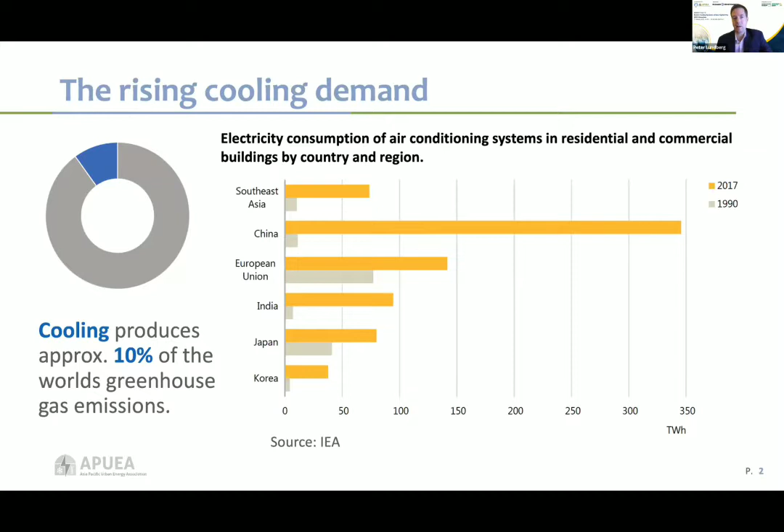Looking into Indonesia, the cooling demand can be demonstrated with cooling degree days, a measurement of cooling demand. Today's cooling demand in Jakarta is about 3,800 cooling degree days, equivalent to neighboring countries including Philippines, Malaysia, Thailand, Singapore. But the AC utilization rate in Indonesia is only around 9%, compared to Thailand's 30%, and Singapore and Malaysia's 80%. So the cooling demand in Indonesia will grow, following economic and population development, but also due to climate change.

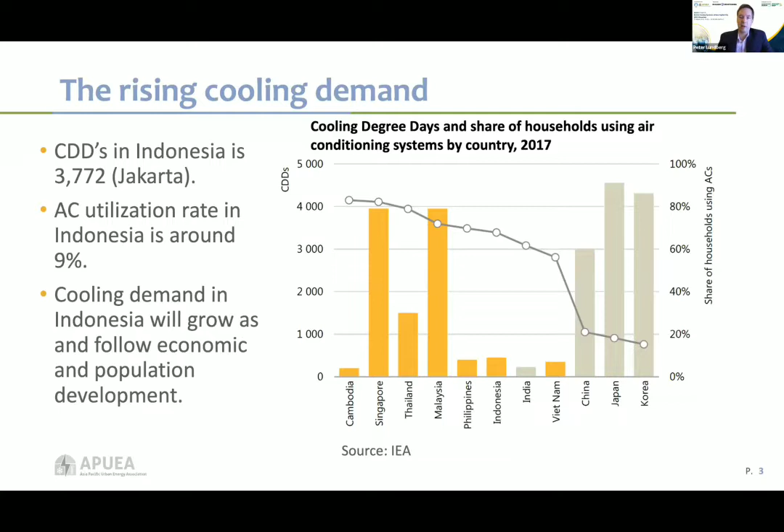Cities play a vital role in mitigating climate change and meeting the growing cooling demand. Cities occupy only 2% of the world's landmass, but consume over two-thirds of the world's energy and account for more than 70% of the world's CO2 emissions. Looking into buildings, they stand for 30% of final energy consumption in the Asia Pacific, and account for a large part of greenhouse gas emissions in cities.

For example, in Hong Kong, that number is 60%. In Tokyo, it's 30%. In New York, it's 70%. Space cooling is the fastest growing use of energy in buildings, and cooling accounted for 18.5% of the total electricity used in buildings at the moment.

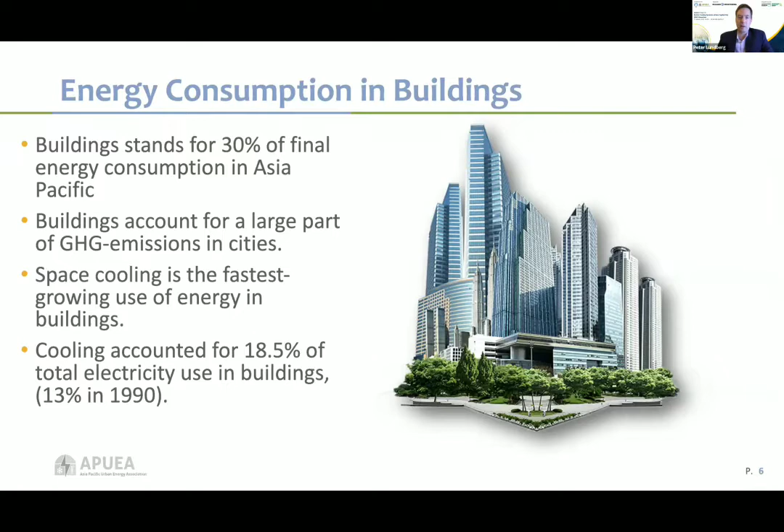I just want to end here by mentioning some developments in Thailand. The Thailand government has invested in a new national government complex in Bangkok, basically a campus collecting different government agencies in one place in the vicinity of Bangkok city. This complex has a district cooling network providing 42 megawatts of chilled water for about 1 million square meters. They have reduced energy consumption by more than 100,000 megawatt hours and reduced 50,000 tons of CO2 emissions.

This is a good example of a trend going on in Thailand, and I think it might be very interesting for the new capital city in Indonesia. I also want to mention that this project is the winner of the Global District Energy Climate Awards as the best district energy system in a developing country in 2021.

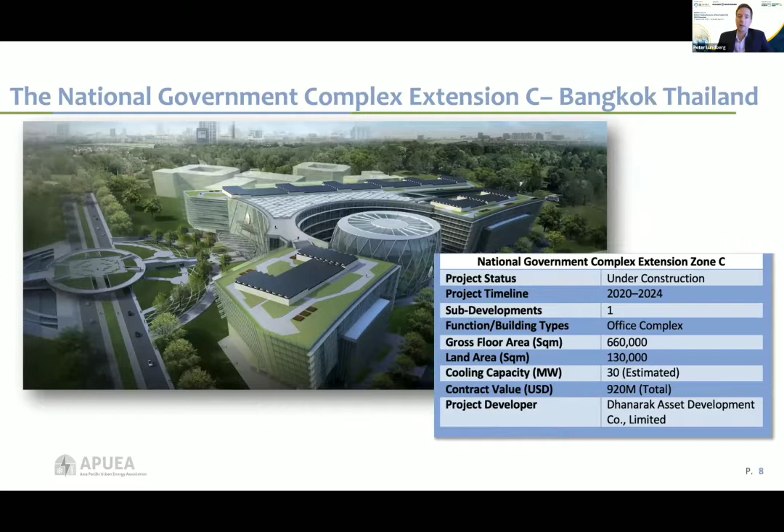They will also expand to build another campus, so the trend is continuing with this kind of government complex, and they will also have a district cooling system of about 30 megawatts.

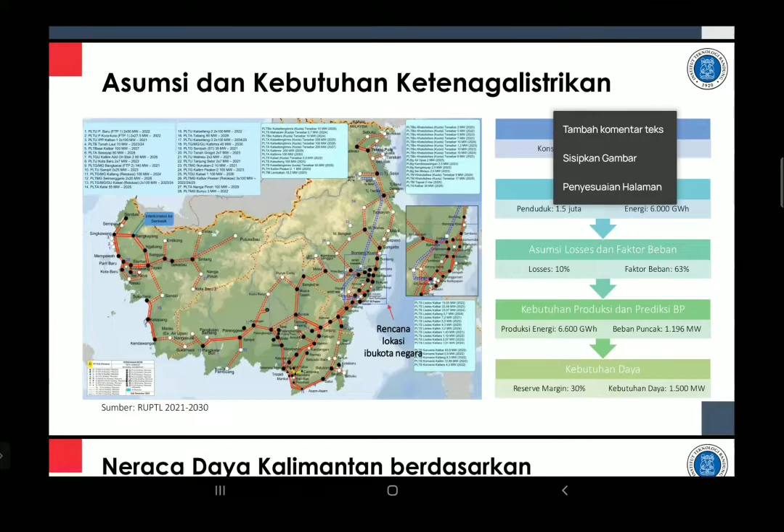We assume the electric consumption per capita is 4,000 kilowatt hours, with total energy of about 6,000 gigawatt hours. So the power need is 1,500 megawatts with a reserve margin of about 30%.

This is the supply for the capital city. You can see in blue, this is in the capital city.

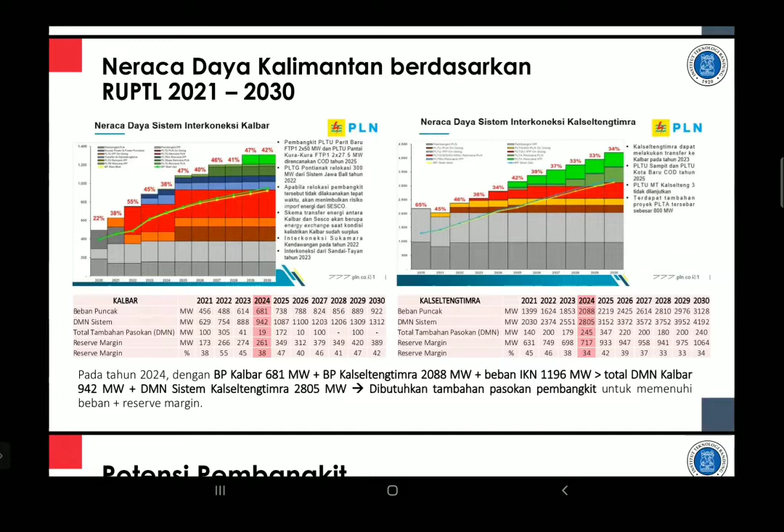If we look at the power balance in Kalimantan from the RUPTL 2021-2030, in 2024 the reserve margin is about 260 megawatts, 38% in West Kalimantan. But in Kalseltengtimra, we have a high reserve margin of up to 700 megawatts.

What is the potential power plant we can build there? For example, in North Kalimantan, we have PLTA Sa Tubu 200 megawatts, PLTA Mentarang 240 megawatts, Sembakung 250 megawatts, Kaltara 300 megawatts, Kayan 1 at 900 megawatts, Kayan 2 at 1,200 megawatts, Kayan 3 at 1,800 megawatts, and Mentarang Induk at 1,175 megawatts.

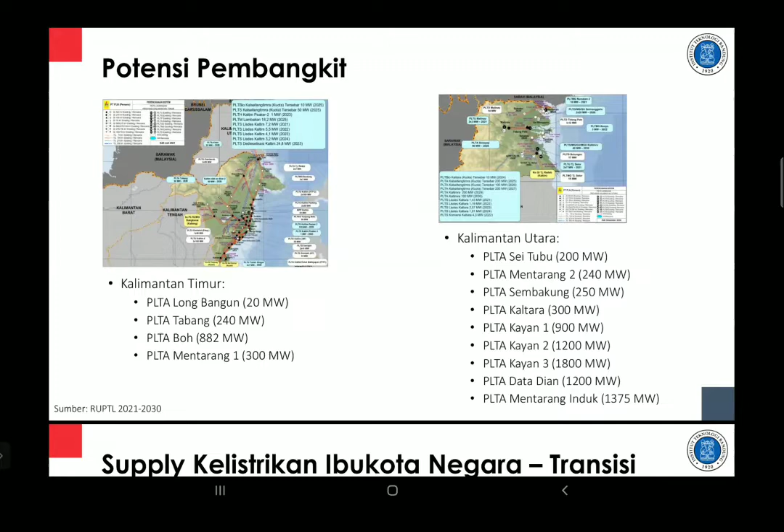In North Kalimantan and East Kalimantan, we have PLTA Long Bangun at 20 megawatts, small hydropower Tabang at 240 megawatts, hydro Boh at 882 megawatts, and Mentarang 1 at 300 megawatts.

How about our concept for the development of electricity on the ultimate side? The blue line is 500 kV in the outer ring and medium ring, and at the center of the capital city the network goes in from 70 kV up to the new capital city.

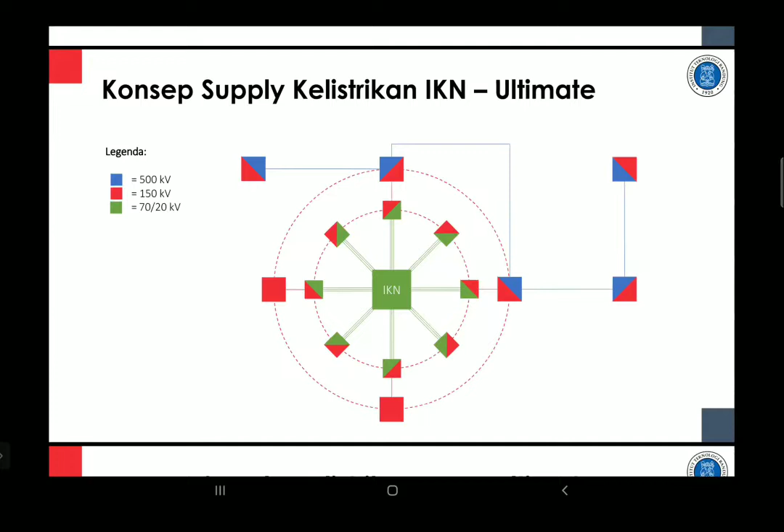Supply will come through 150 kV in the first circle around the new capital city. The second ring combines 150 kV and 275 kV relay, though this is not yet in place, and 500 kV will also supply the network.

That is the ultimate supply from 150 kV to the capital city, which sits at the center of the network. We can feed it from GI Samboja, Sepaku, Embalut, and Petung.

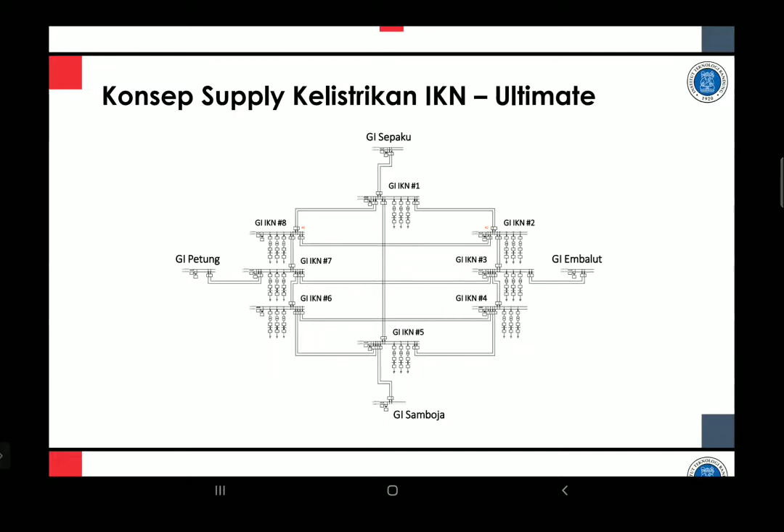There are four substations supplying the new capital city directly. This is good for the reliability of the power system in the new capital city.

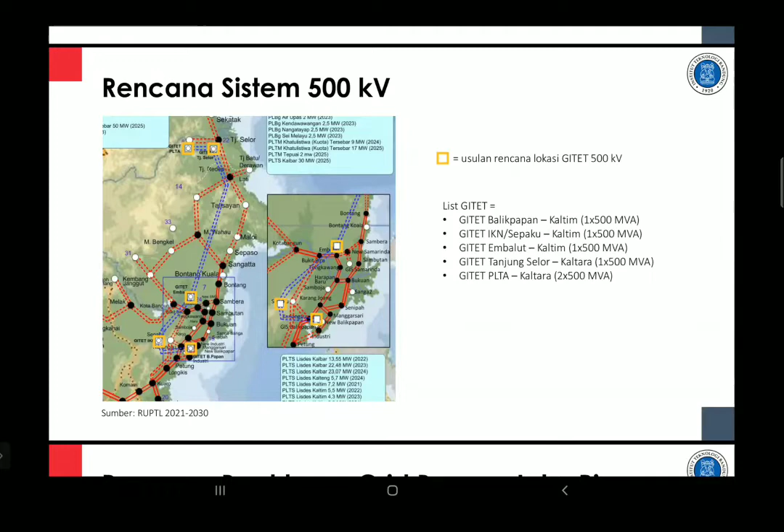We have 500 kV supply already stated in the RUPTL: from substation Balikpapan Kaltim 500 MVA, Sepaku Kaltim 500 MVA, Embalut Kaltim 500 MVA, Tanjung Selor Kaltara 500 MVA, and PLTA Kaltara 2 times 500 MVA. This will support the new capital city.

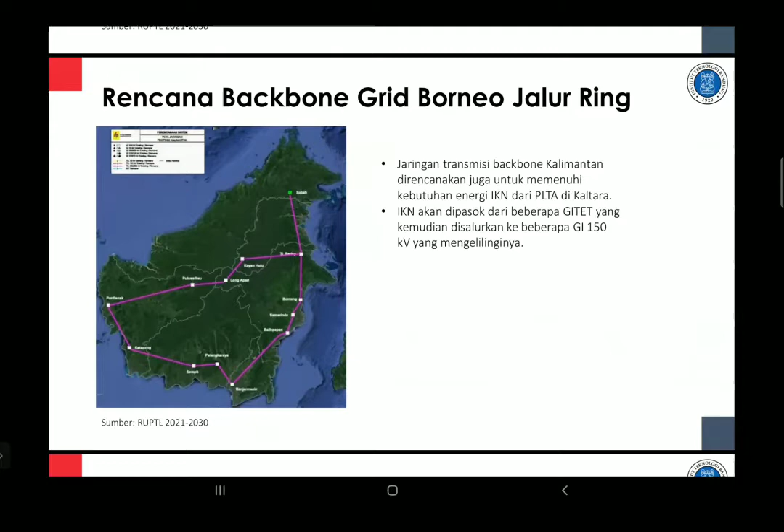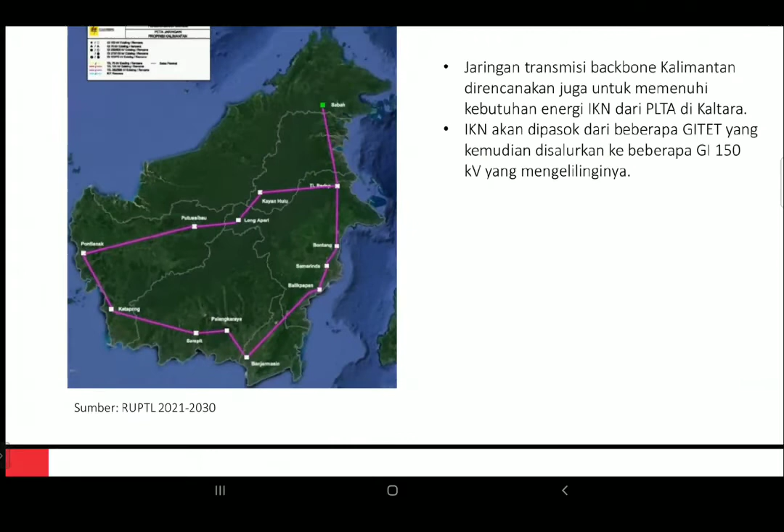If we look at the backbone of the Borneo grid at 500 kV, it comes from Sabah going to Tanjung Redeb and also Kayan Hulu Long Apari. This 500 kV network will also support the new capital city. This 500 kV line is already planned by the utility, PLN.

But we have some problems with small signal dynamic analysis in the Kalimantan interconnection, regarding inter-area oscillation and local area oscillation frequencies. This is in the high voltage and extra high voltage network.

But within the city itself, the new capital city will be supported by a 20 kV model using flexible operation network for high reliability.

We have 3 zones: R1, R2, and R3. R1 is the center with an area of 2,000 hectares. R2 is the district of the new capital city with 40,000 hectares, and the outer area covers 180,000 hectares. These three zones should be supplied with good reliability of electricity.

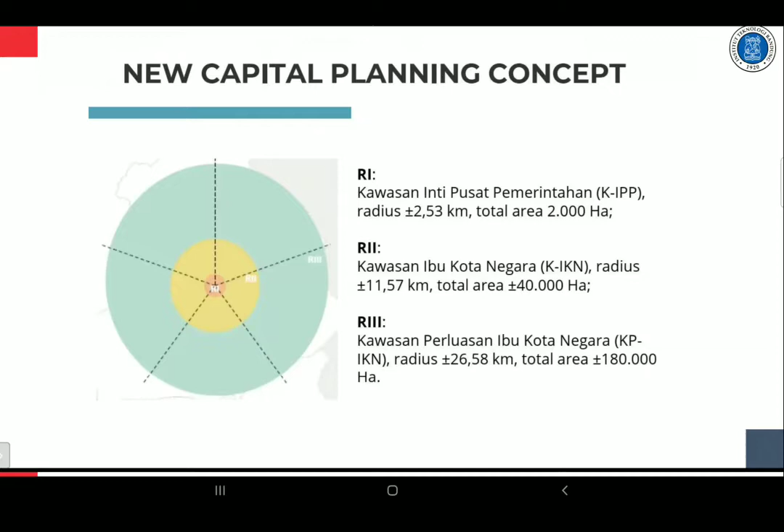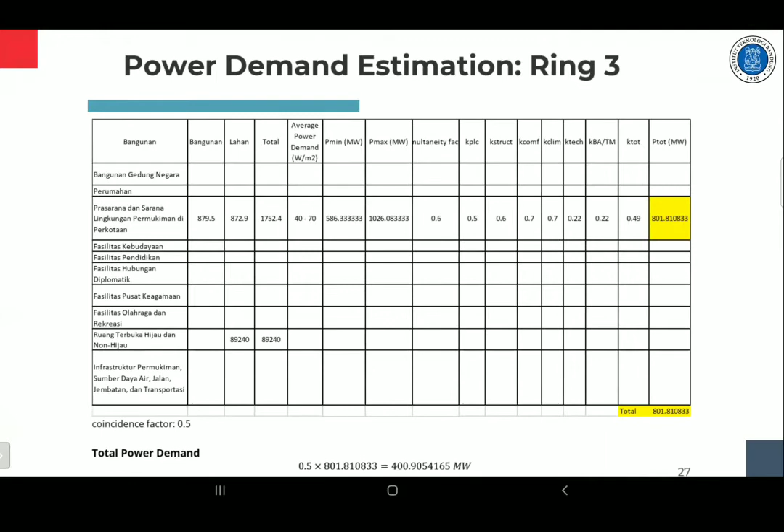So if we calculate the substation requirements: for Ring One we need 2 substations at 150 kV and 20 kV; Ring Two needs 8 substations at 150 kV and 20 kV high voltage substations; and Ring Three needs 5 substations with a capacity of 80 MVA.

The total requirement for high voltage substations is 15 substations to support the new capital city.

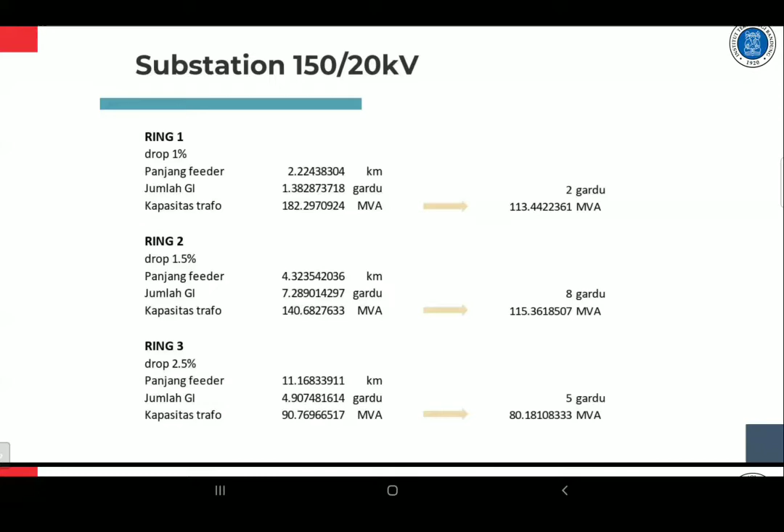For low voltage distribution substations, we have already calculated about 2,200 distribution substations will support the total area of the new capital city.

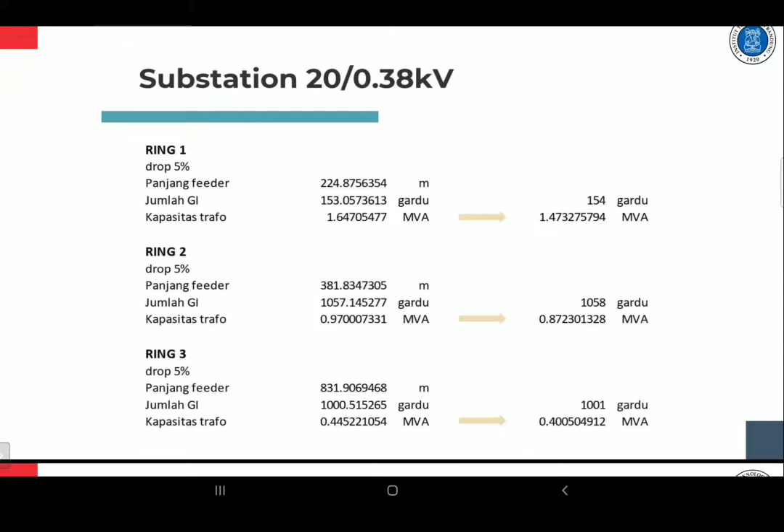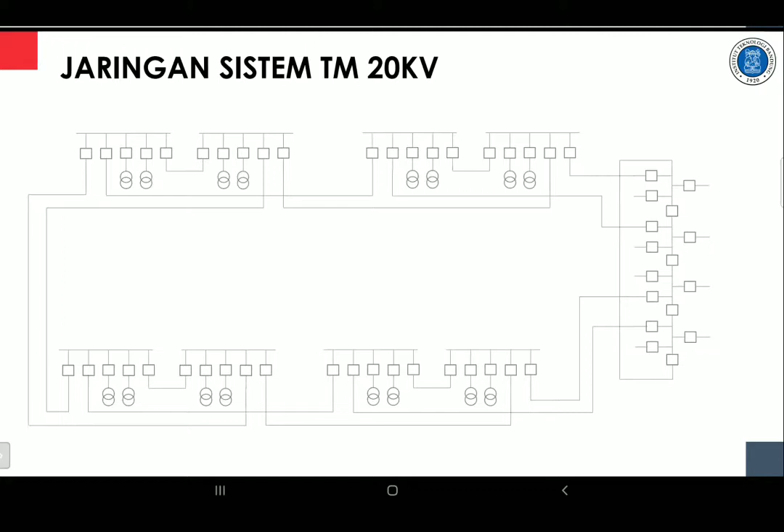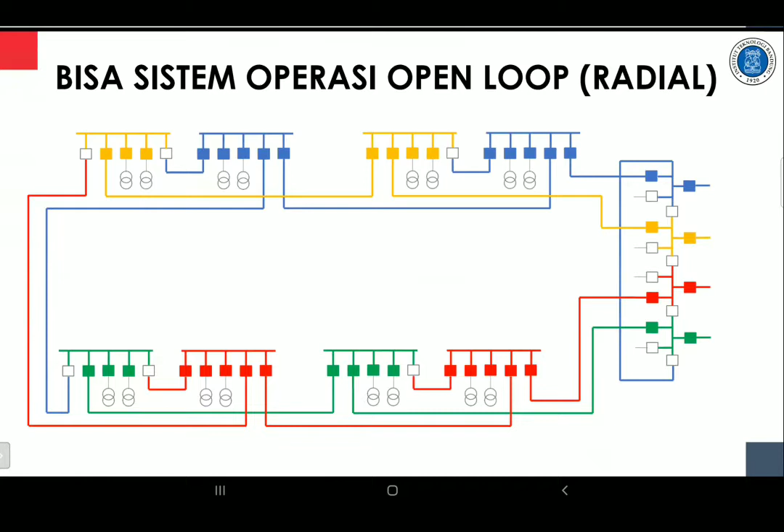How will the network be developed? The network will be developed for 20 kV based on open loop and ring system, and also loop system and mesh system. The concept is to get high reliability to supply all of the office buildings in the new capital city.

This is the operation based on the radial open loop system that is built in interchange, like this. This uses a fork modification of the open loop system, like the one we use in Soekarno-Hatta Airport, the model for operation with high reliability for the 20 kV network.

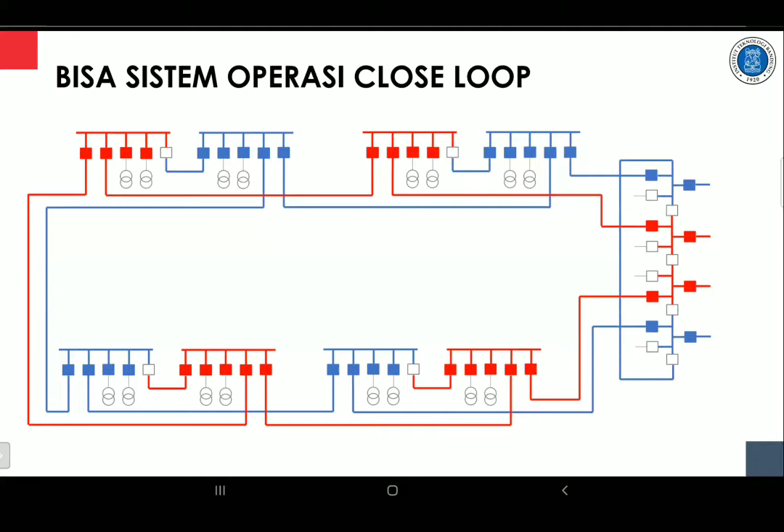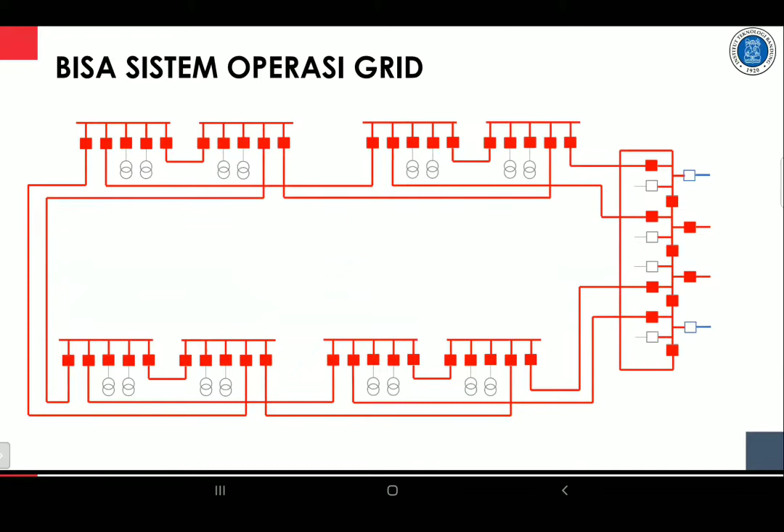And also for the closed loop, the closed loop network of 20 kV, there is higher reliability than the first and second ones. This is the grid operation. This is an alternative way of operating the network in 20 kV.

For the low voltage, we have added some UPS at some points to get better reliability without dip, meaning without voltage dip. We calculate all of the load, separating loads that are not allowable for dip and loads with allowable voltage dip. We cluster them and add the UPS system there.

We have some simulations, for example like this. For instance, if a fault happens there, what happens is the breaker here and here will be turned off, and then how will the system be covered? This is really the simulation of the network for the fault and for the restoration.

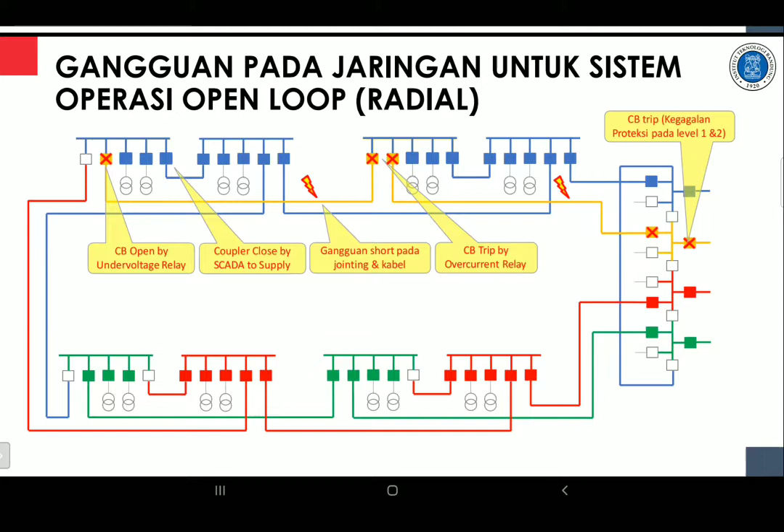This is for the open radial, how the network is covered to get good reliability in the system. We check until n-2 contingency, meaning 2 of the components in the cabling network will be off from the system. The system is still available, good, and running well.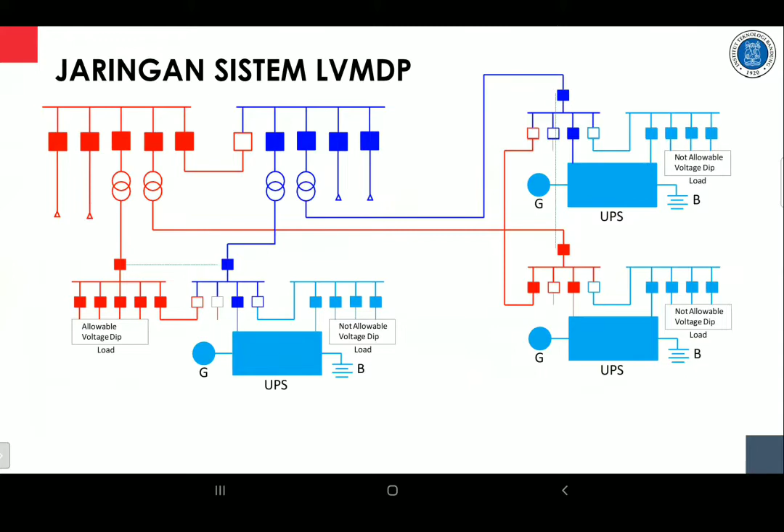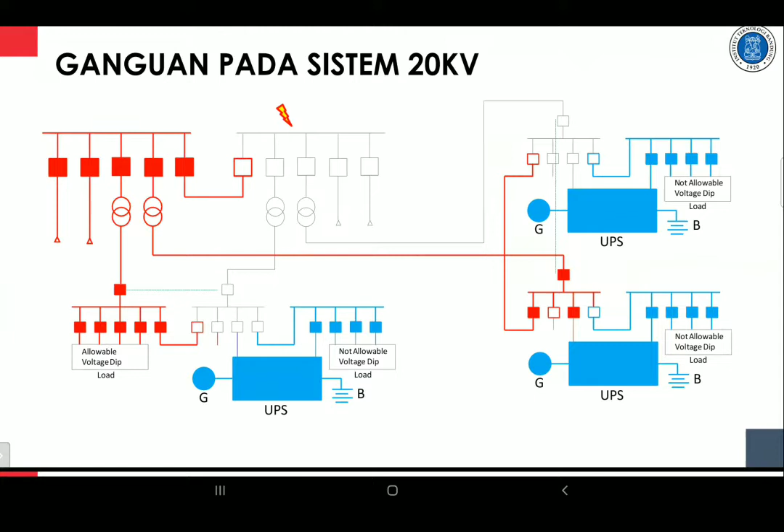This is our presentation on how to get good reliability. We have presented the big system, high voltage, extra high voltage network, and the 20 kV network that will be fit into each housing or office building in the new capital city. I think that's good. Thank you for this presentation.

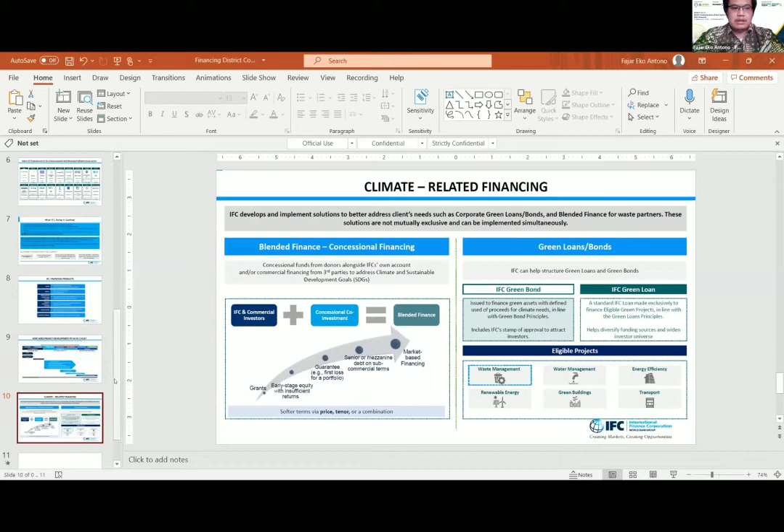So, very quickly on IFC and our role in urban infrastructure development, including in this session, the district cooling utility. IFC is part of the larger World Bank Group, along with our sister organizations. What makes us unique compared to other organizations within the World Bank Group is that we are mandated to boost private sector solutions to tackle or solve development problems. Throughout our history, we have committed no less than 60 billion in portfolio, including 30 billion committed last year.

Our products, or what we can offer to the private sectors working in this space, is basically, first of course, as a financier, we provide investment. We can work through multiple instruments, either loans, equity, derivatives, structured finance, blended finance, syndication, trade or commodity finance.

But apart from that, one of our additionalities is to provide upstream as well as advisory services. We position ourselves as a long-term partner for our client, not only by providing investment, but also working with them even prior to the investment itself, to prepare the project, even sometimes to the extent of creating the market. This is very typical in emerging markets, where the number of bankable projects is sometimes very limited. Therefore, we work proactively on how we can create the project itself together with our client.

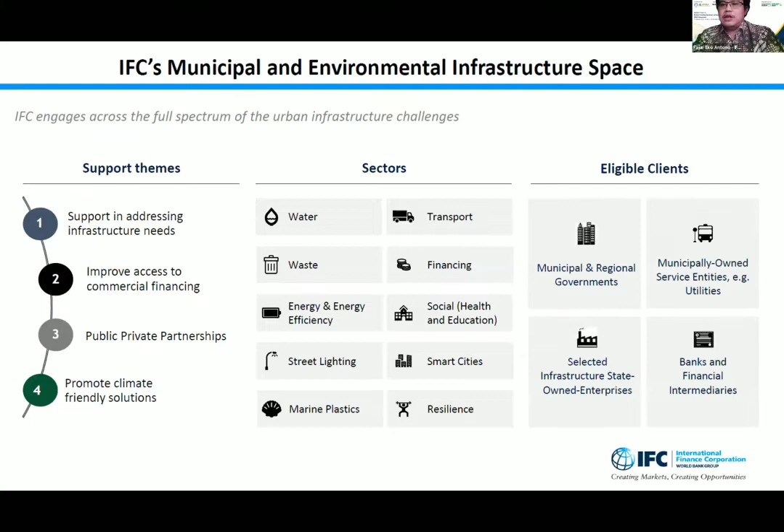This is some of our example engagements with regard to the municipal and environmental infrastructure sector. We work in many regions of the world: Asia, Latin America, Europe, and other regions as well.

Here, one example is our recent engagement with Tabreed, which is one of the largest district cooling utility providers. We provided them with equity.

In the cooling space, what we do is support the deployment of efficient space cooling infrastructure, including district cooling, and also support low carbon and energy efficient buildings to reduce demand for cooling, particularly using our toolkit called EDGE, which is a toolkit for green building certification.

Also supporting the expansion of cold chain infrastructure and services by third-party service providers, and supporting startups developing new energy efficient technologies. As of now, we have financed not district cooling but district heating.

As many as six projects since 2019, including two private district heating companies and three municipal utility companies in Russia and Romania. The investments were accompanied by advisory projects, which, as I mentioned, is part of our additionality.

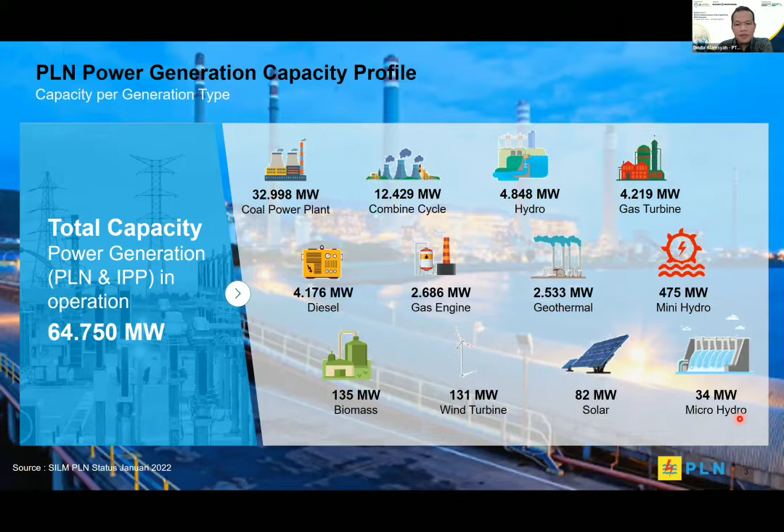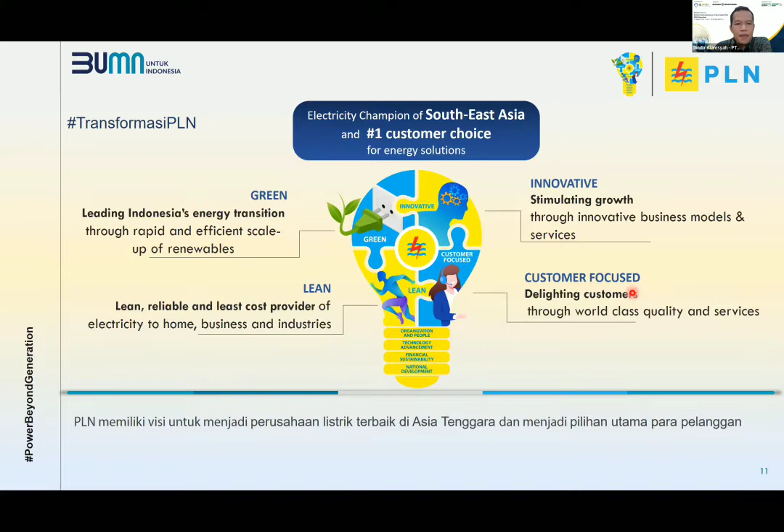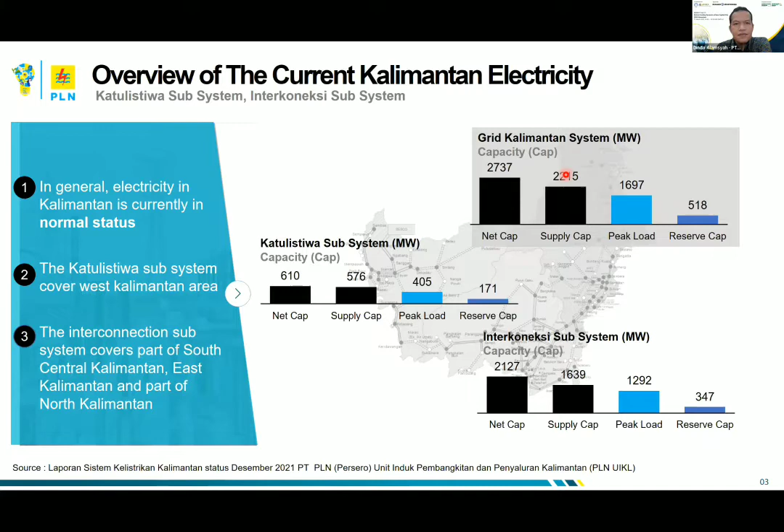The new capital city as a representation of national identity and as a smart, green, beautiful, and sustainable concept. Electricity concept for IKN is smart, green, and beautiful. Currently, Kalimantan electricity grid system, Kalimantan interconnection, and Katulistiwa subsystem will be integrated as one big loop grid system. Energy flow from Eastern, Central, Western Kalimantan will be more dynamic and balanced. PLN ensures the availability of reliable, efficient, clean, and environmentally friendly electrical energy.

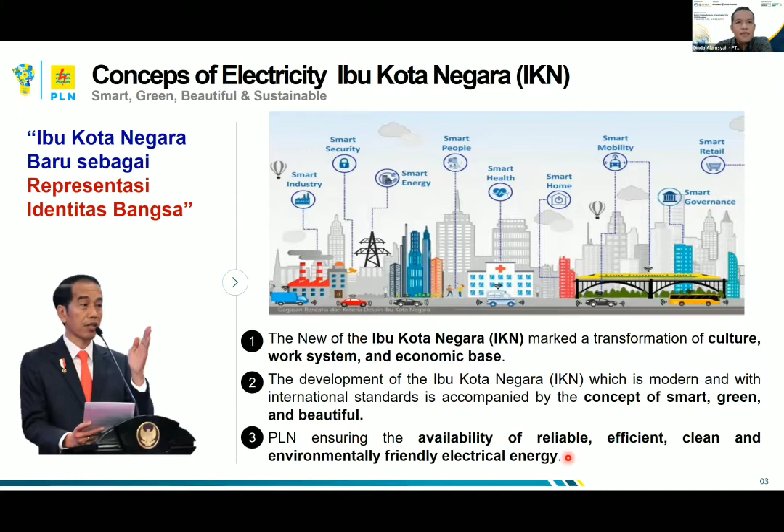PLN's strategic initiative for electricity at IKN is based on RUPTL 2021 to 2030. Estimated electricity demand at IKN is approximately 900 megavolt ampere, and it will be operated in stages by PLN. Plan design and criteria for electricity in the new IKN, based on RUPTL, implements several concepts: zero downtime, circular configuration grid, smart grid, underground cable, and green energy.

National palace is the first priority, with 1 second downtime per year. Government central office has 5.3 minutes downtime per year. And IKN has 53 minutes downtime per year.

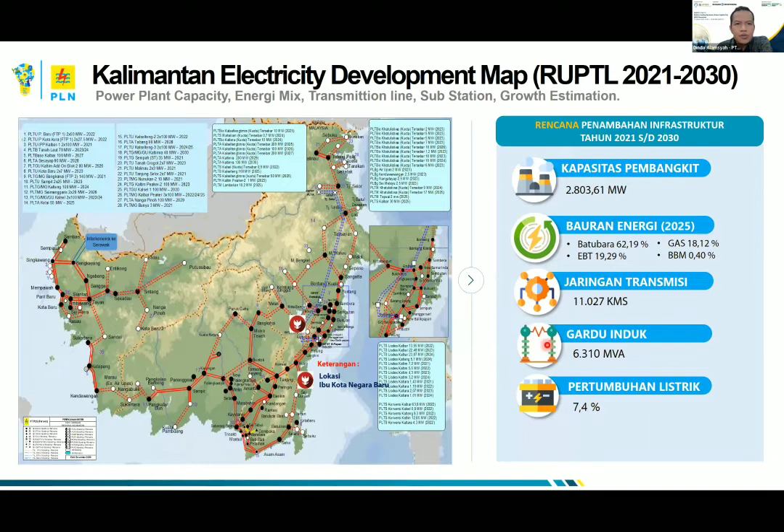Transmission line will reach out 11,000 kilometer circuit, and substation capacity 6,310 megavolt ampere. All mentioned above rely on forecasted electricity demand growth around 7.4%. This plan strengthens PLN's commitment to cope with the electricity demand growth, which is impacted by IKN. The more important thing is PLN ensuring reliable and green electricity supply to be aligned with IKN's vision.

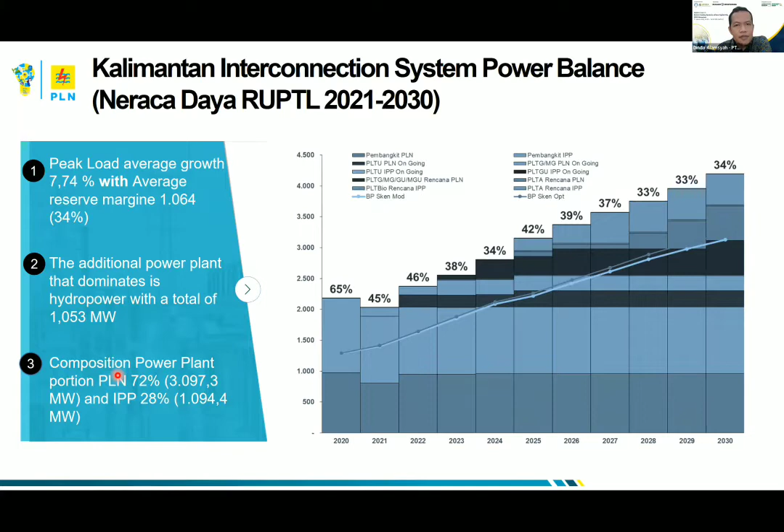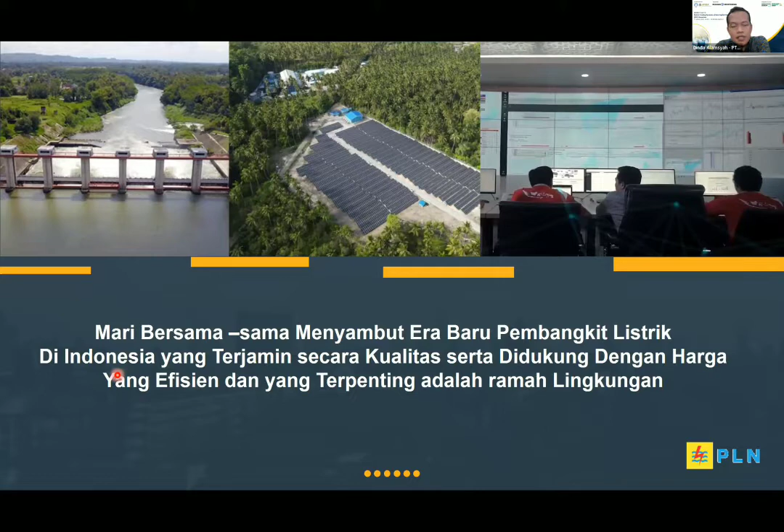PLN is committed to supporting the new capital city, known as IKN, by providing reliable electricity supply and environmentally friendly energy by improving the composition of green energy. This is the end of our sharing. Thank you for your attention. IKN is Indonesian pride, and PLN is warmly open to collaboration opportunities in the future to ensure reliable and greener electricity supply for IKN, the new capital city of Indonesia. Thank you.

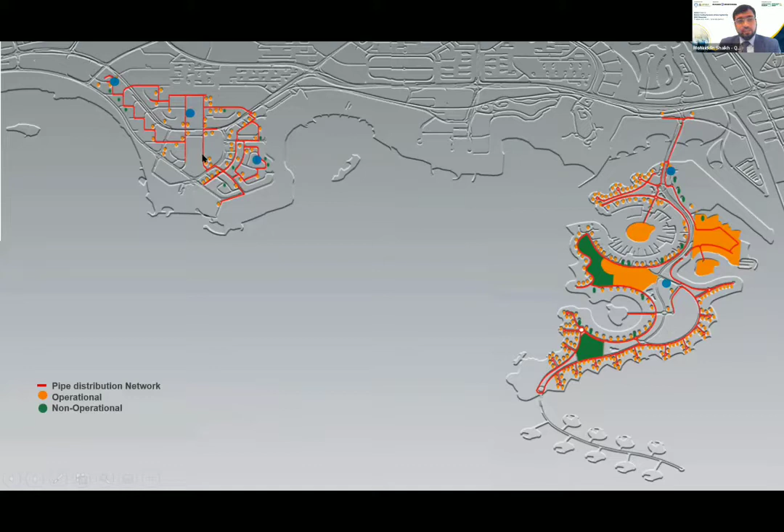As for the introduction, I'm working as a technical manager in Qatar Cool District Cooling Company. We are one of the largest district cooling providers in the world, based in Qatar, and geographically here we are. Qatar Cool was established in 2003, and we have around 5 district cooling plants located within Qatar. We operate in 2 districts, mainly the West Bay and the Pearl, as we can see on the screen. The first plant was built in 2006, with a capacity of 25,000 TR, which also includes 25,000 ton-hours capacity of a TES tank, thermal energy storage tank. The plant has 10 chillers, each of which is a train around 2,500 TR.

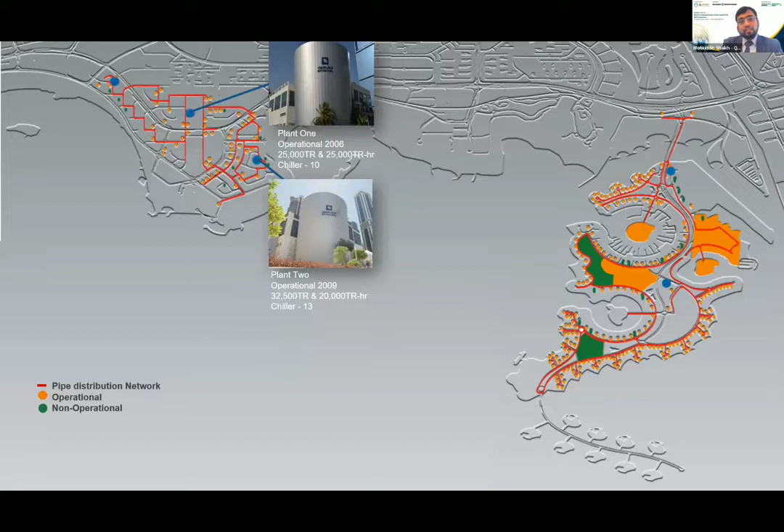There are 3 plants located in the West Bay network. The second plant was commissioned in 2009 with 32,500 TR capacity and 20,000 ton-hours of thermal storage tank. It has 13 chillers of similar capacity. Our P3, the plant 3, is the latest plant, commissioned in 2018, operational with 35,000 TR capacity. All these plants are connected to a single network in the West Bay.

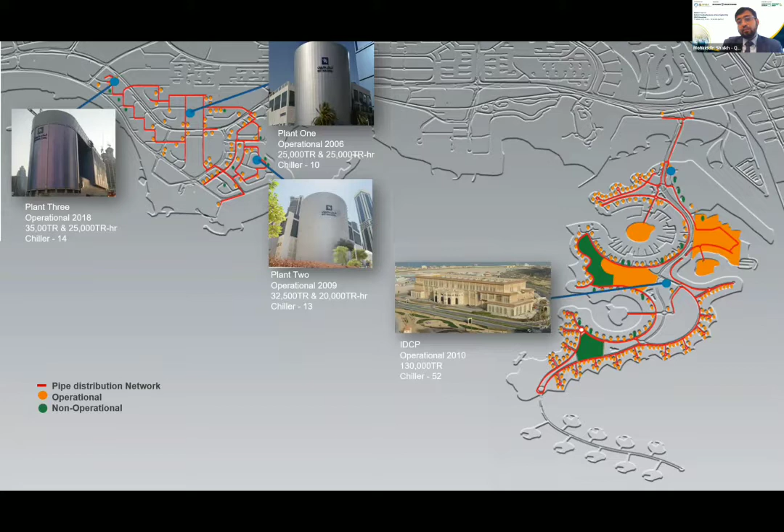The 4th plant is IDCP, Integrated District Cooling Plant. At the time when it was built in 2010, it was the largest district cooling plant in the world. And currently, if you assess it based on its capacity and the network it is serving, it's probably still the largest cooling plant and network combined. It has 52 chillers, each of 2,500 tons capacity, arranged in series counterflow arrangement.

The latest plant, which is under construction and will probably be operational in a month or 2, is the Gewan Island District Cooling Plant, which serves a new island called Gewan Island with a capacity of 18,000 TR and thermal energy storage tank of 15,000 ton-hours.

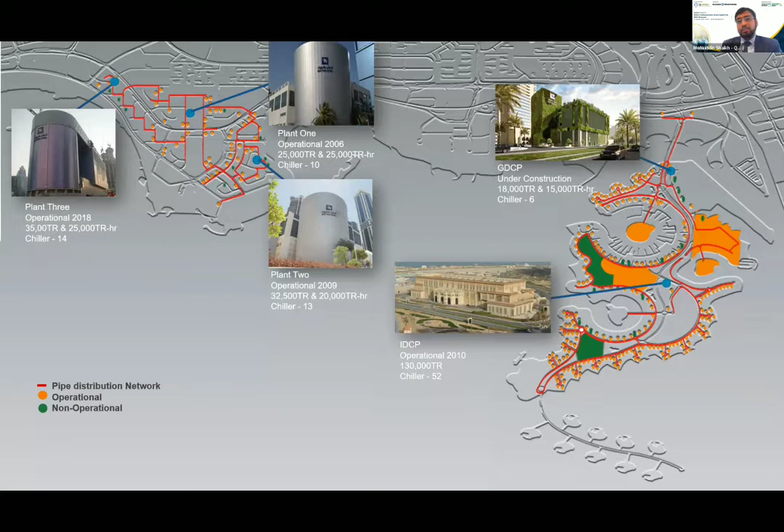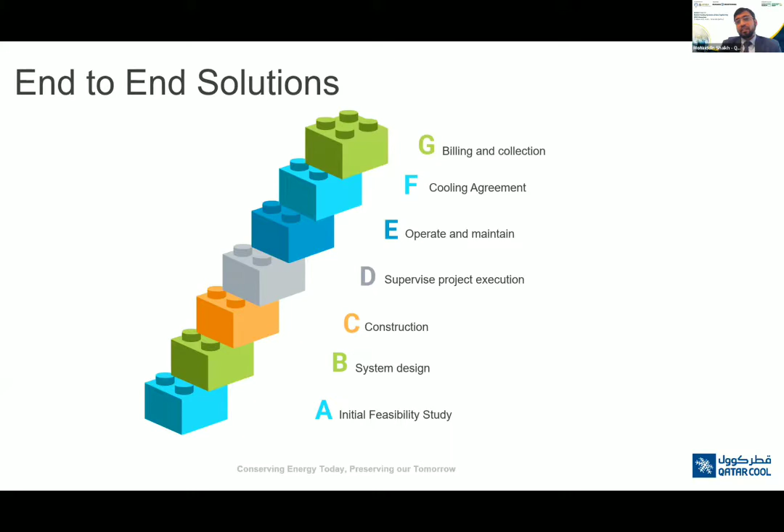Qatarcool provides end-to-end solutions right from feasibility study to system design, construction, supervision of the project. We do operate and maintain. We enter into cooling agreements with the end users. We manage that process until billing and collection. So right from the concept to the life cycle of the project, operations, billing and collection, and so on, we provide a full range of services.

This webinar is based on district cooling service in the context of the new capital city of Indonesia. I thought of sharing some of the key considerations that should be taken into account during the various phases of design, construction, and operation, from my previous experience and the combined experience of Qatarcool.

The location of the plant is one of the key aspects. Firstly, the weather conditions have to be considered while designing the plant, especially since most district cooling plants are water cooled, so wet bulb conditions play a critical role. If the weather is dry, it has got different challenges compared to where the weather has higher wet bulb conditions. Indonesia, being an island nation, most developments would be on the seashore, so it would experience higher wet bulb conditions. Cooling tower sizing would get affected by that.

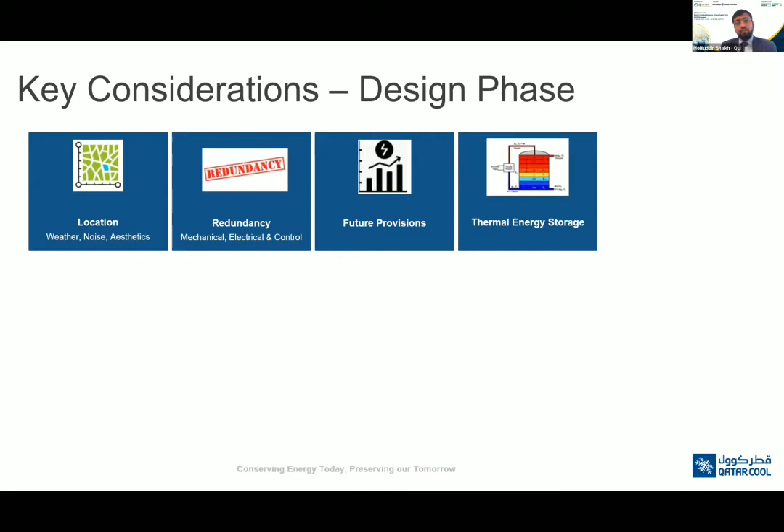It would help in shaving off the peak loads, and also, if your plant is provided with a renewable energy source, obviously the source will not be able to serve the whole plant because of its higher energy requirement, but you can maximize the use of renewable energy when the thermal energy storage system shaves off your peak.

Concurrently maintainable, because the DCPs, district cooling plants, are critical infrastructure, and any interruption, either accidental or for maintenance, any reduction in capacity during peak conditions would severely affect service to end users. So the systems have to be designed so that even in summer you are able to maintain your critical plant.

Piping and distribution network and valve chambers. So the PDN has to be designed taking into consideration, especially if you are in the coastal area, the water table. I'm assuming the water table would be high, as Qatar is an island nation, same as Indonesia. So the water table is high in the areas where we serve. That poses a challenge to us, having a properly designed piping system to take care of corrosion because of the seawater. That is critical. And the sizing of the distribution network has to take into consideration the capital cost against the operation cost, and the future expansion, corrosion, etc.

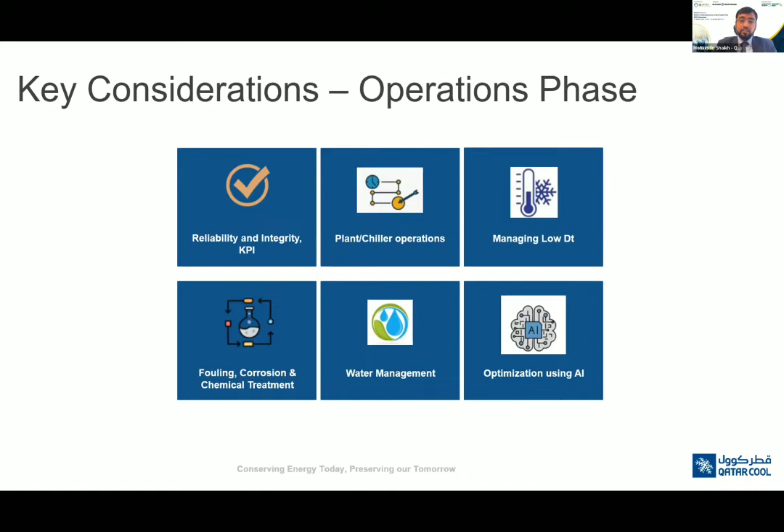These were the key aspects I would like to highlight during the design, construction, and operational phases. As I said, Qatarcool is one of the largest district cooling providers in the world, which can provide end-to-end solutions right from concept to building the DCPs, operating throughout the lifetime of the life cycle of the DCP, including billing and collection and so on and so forth.

Should you - and we would be very much interested in - any opportunity which is available for us to invest, build and operate the plants, we would be more than welcome to explore any opportunity. Here is my contact details. I can be contacted via my email address, or through the organizers.

Any questions, as per the procedure of the webinar, I'm here available to answer the questions anytime. Thank you very much.

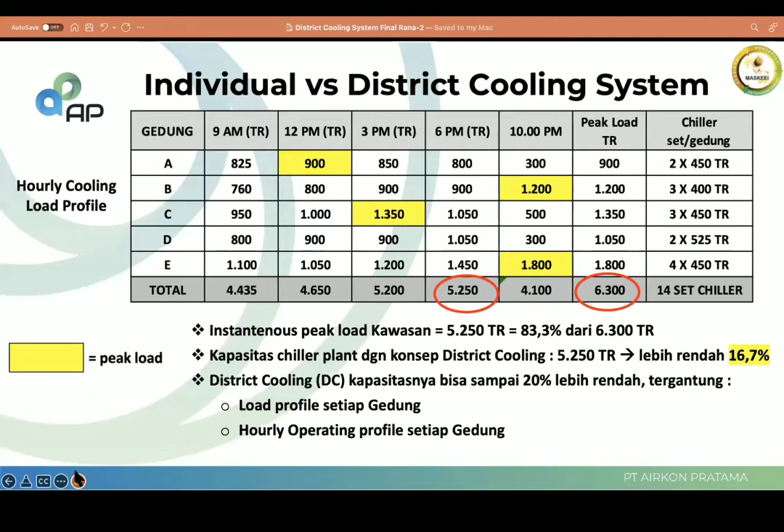Jadi kalau ini saya pindahkan gedung ABCD tadi, itu peak load-nya, tadi total 6.300 ton, dan masing-masing, misalnya yang 900 ton, ini disuplai oleh 2 kali 450 dan seterusnya, sehingga dibutuhkan 14 set chiller untuk individual system. Kemudian untuk water pump-nya, 2 chiller ini dipasang 3 pompa karena 1 dianggap standby. Chillernya saya masih belum hitung standby, nanti bisa dianalisa.

Condenser pump juga 1 standby, cooling tower tidak ada standby, maka total equipment-nya adalah seperti yang ditunjukkan pada kolom paling kanan. Sehingga kita bisa lihat bahwa total peralatan yang ada untuk individual system itu ada 54 unit peralatan, terdiri dari 14 set chiller, 19 set water pump, 19 set condenser water pump, dan 14 cooling tower.

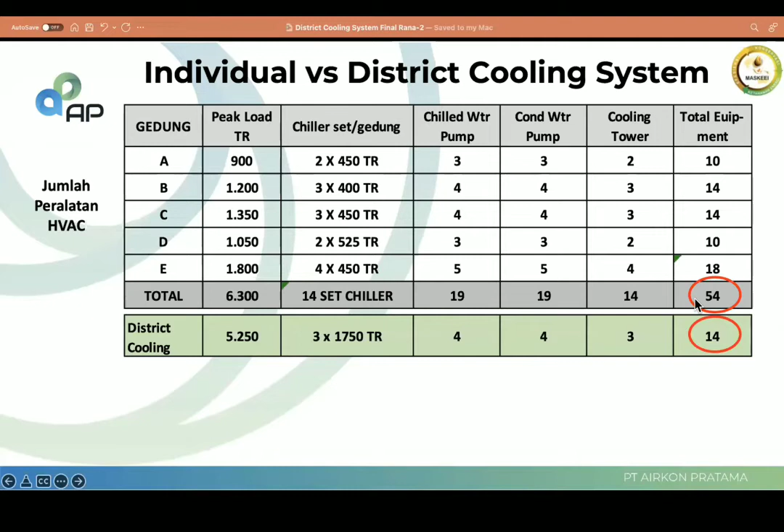Sementara kalau menggunakan district cooling, kita hanya membutuhkan 14 unit peralatan, terdiri dari 3 chiller, 4 unit pompa, 4 lagi condenser pump, dan 3 cooling tower. Kalau kita anggap bahwa chiller ini juga harus ada standby, saya sudah ngitung, maka jumlah dari individual itu tambah lagi semuanya itu 5, jadi 59 dibandingkan ini 15.

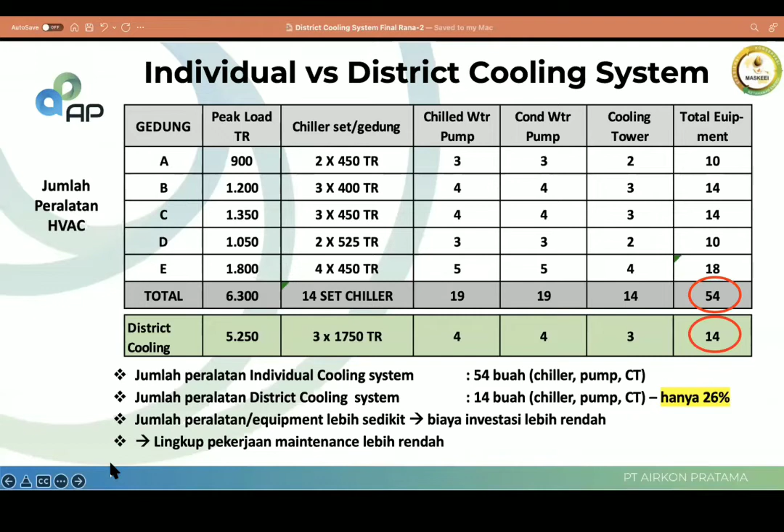Jadi artinya apa? Jumlah peralatan individual cooling itu 54 buah peralatan, sementara district cooling hanya 14, artinya hanya 26%. Jumlah peralatan yang lebih sedikit, tentu biaya investasi lebih rendah. Kenapa? Nanti ada slide berikutnya tentang biaya per dolar, biaya per ton capacity. Yang paling penting adalah lingkup pekerjaan maintenance-nya menjadi lebih rendah. Nanti dibahas pada slide yang lain.

Bagaimana kalau dalam sebuah kompleks yang commercial area, seperti misalnya SCBD mau dipasang district cooling, itu bagaimana? Karena kan gedungnya macam-macam, yang punya macam-macam, operatingnya juga oleh macam-macam, sehingga ini harus ada sebuah regulasi, ada intervensi daripada pemerintah, adanya regulasi yang mengharuskan kawasan tertentu harus menggunakan district cooling dan melarang tiap gedung di dalam kawasan tersebut mempunyai chiller plant sendiri.

Contohnya di Dubai, mungkin di UAE atau mungkin di Qatar tadi Mr. Shaikh juga memberikan contohnya misalnya. Itulah sebabnya di UAE itu district cooling sangat maju luar biasa karena pemerintah menerbitkan regulasi.

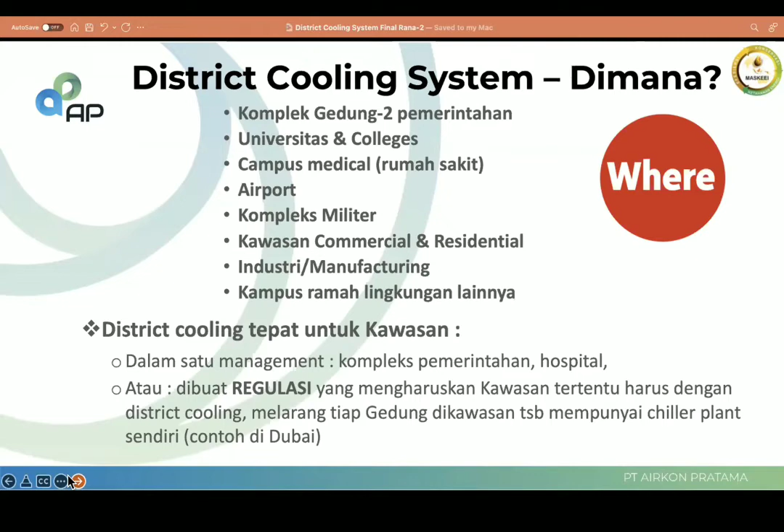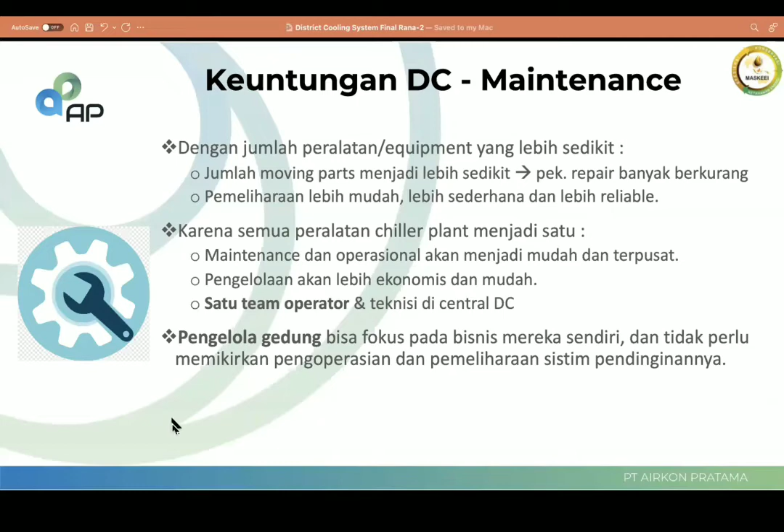Baik, ini biaya investasi. Misalnya untuk individual system, untuk gedung yang 5 tadi, di peak load-nya 6.300 ton, ada 14 set chiller, kira-kira 400-an ton satu chiller. Sementara kalau dibuat district cooling, totalnya 5.250, maka cukup ada 3 chiller dengan kapasitas 1.750.

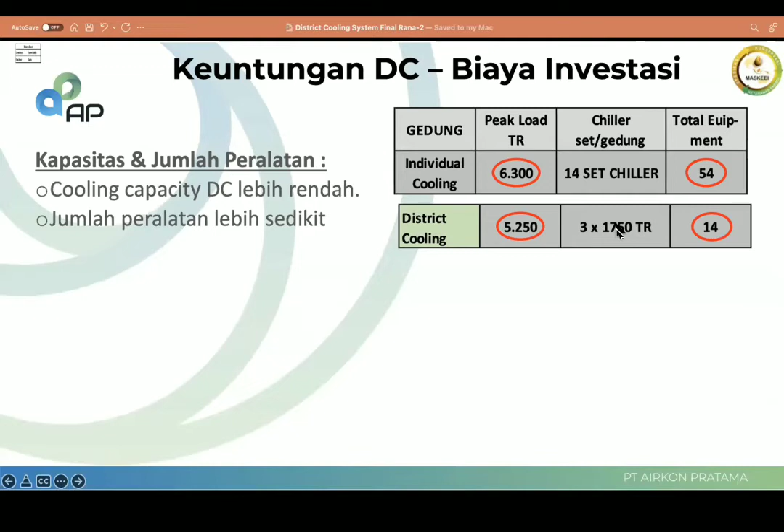Nah kalau dilihat dari sini, kapasitasnya sudah lebih kecil, jumlahnya juga lebih rendah. Jadi cooling capacity lebih rendah, jumlah peralatan lebih sedikit. Artinya biaya investasi lebih rendah, karena makin besar kapasitas chiller, makin efisien dia. Sekarang kalau dilihat dari soal harga investment, harga chiller per unit dengan kapasitas lebih besar, harganya lebih rendah dalam US dollar per ton.

Baik, mari kita teruskan. Apalagi yang lain, yaitu laporan keuangan. Ini ada keuntungan, kenapa? Karena tidak membebani balance sheet daripada klien, daripada gedung. Ini yang disukai oleh para pemilik gedung atau kompleks komersial karena tidak membebani balance sheet.